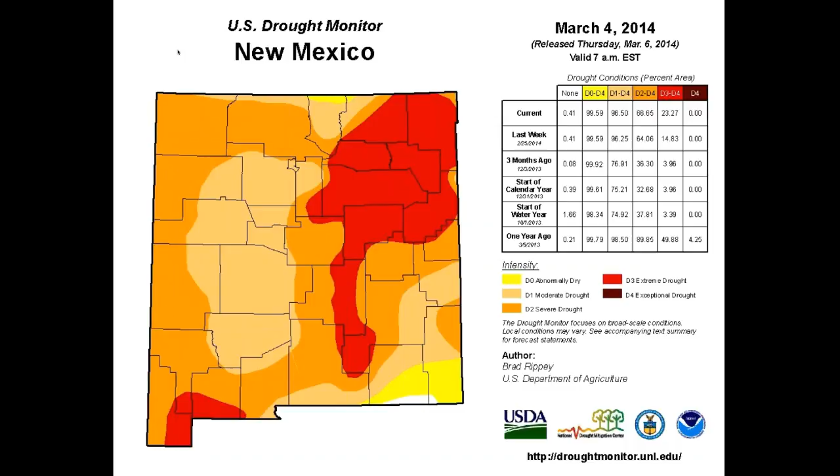Here is the recent U.S. Drought Monitor map showing the West is in a continued long-term drought. Even with the recent water that you've been getting in California, in the long term, things are looking pretty dry. And we're basically living in an age of uncertainty. With all the information and technology that we have, we still don't know what's going to happen with our weather.

With this drought and also with long-term climate change, the experts say we know that we're going to get warmer, but some places may get drier, some places may get wetter, and basically how can we design resilient systems for whatever our uncertain future brings us, right?

And also there's a growing trend in Western countries where people want to know where their food comes from. They want to have increased health while decreasing the miles that their food travels to get to their table. And even wanting to produce more of their own food, right? So many people in the West are actually seeing producing their own food is increasing their quality of life.

So how can we merge our desire to produce our own food while mitigating the effects of our uncertain weather patterns to provide resiliency and abundance for our families and our communities? In this presentation, I want to offer 5 key strategies to do that.

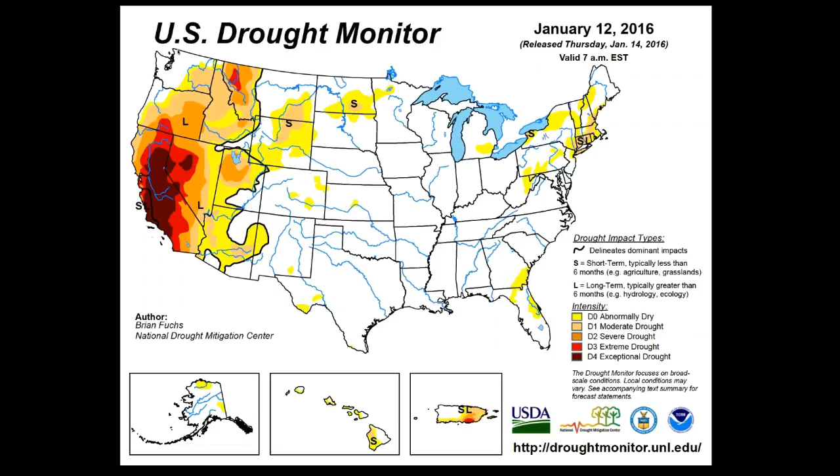So again, we've been in this drought system, and I wanted to bring up the point about drought versus desertification. Drought we have, at a community level, very little control over, but we do have control over desertification at the larger scale, depending on our land use patterns and the engineering and design patterns of our communities, right? So from overgrazing to designing hard structures to drain all of our water away, there's a difference between drought and desertification, and we have some control over desertification.

In the arid Southwest, in the New Mexico region, I'm based in Santa Fe, New Mexico, and in recent years, 2013 and 2014 were our two driest years on record, and we had several wildfires. These wildfires tend to seal the soil and not allow water recharge in the soil, which increases the water runoff. Oops, I got the slides going here. It increases the water runoff, quickly taking the topsoil away and reducing the amount of water infiltration in our soils.

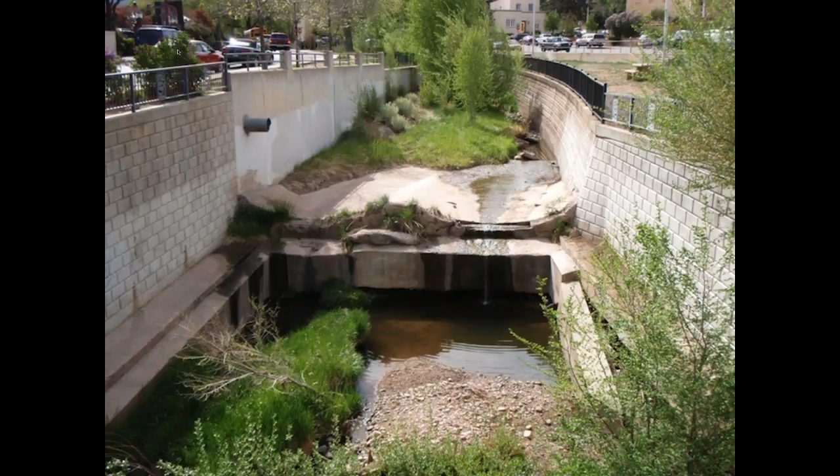This is our mighty Santa Fe River. You can see that it's quite engineered and quite hard. There's much hard structures around it where it can't really infiltrate very well. And again, we can't control droughts on a community level, but we don't need to increase desertification by draining our arid landscapes of the stormwater. This approach to civil engineering and management of stormwater and development and infrastructure projects basically drains our sponge in the soil.

So what is dehydration infrastructure? Basically, it's increased non-porous areas, roads, and houses, deforestation of the mountains, selective overgrazing, stormwater diversion, which of course leads to increased runoff, lower aquifers, loss of rivers, increased work, and less food.

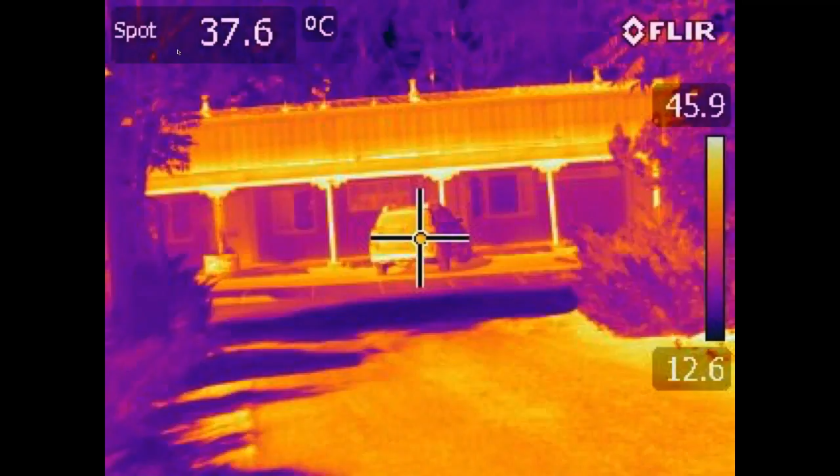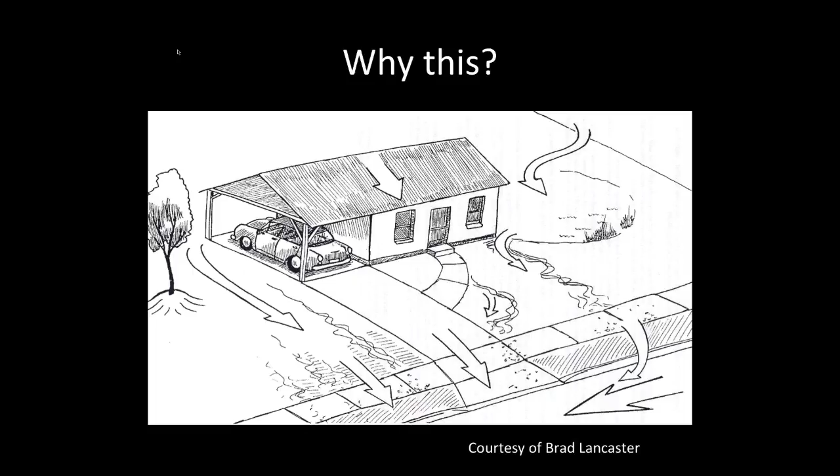So this is typically how we design most of our residential lots, right? We basically designed this dehydration infrastructure into most developments, draining all of the water off onto the street, picking up oil as it goes, rushing quickly to the river. And so why would we design this? Why wouldn't we want to actually keep the water where the plants are and design a more abundant system?

So again, how do we want to design scarcity or design abundance, right? And I wanted to just come with some positive reinforcement today that we can design our way to abundance, right? And these five strategies that I'm bringing today can help us do that.

So again, on the left, this is a path to scarcity. We drain all the water onto the streets. Then we import chlorinated water in our drip systems and barely keep our plants alive. Where we could just keep all of our rainwater on site, infiltrating into areas that are beneficial to the plants, and greatly reduce our need for irrigation and have a more abundant system around our house.

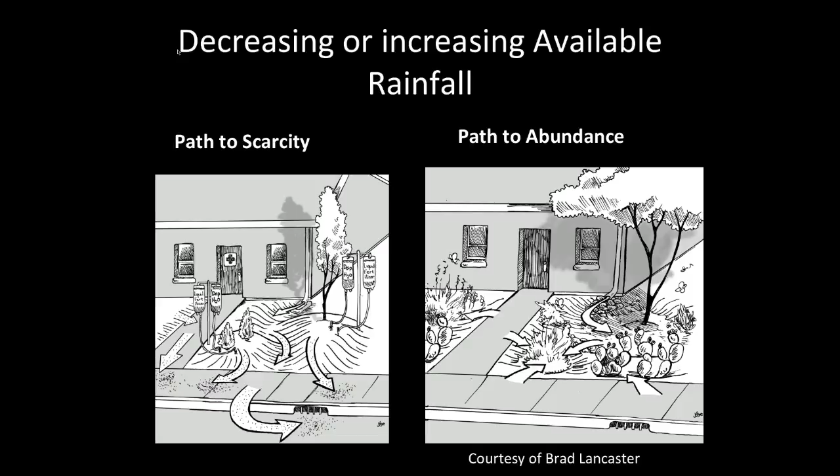So here's some basic water harvesting principles. They're basic common sense. Obviously observing where your possibilities are, what your options are, starting at the top, working your way down. Like so many things in life, starting small and simple. And again, this is our key strategy here, is to slow, spread, and infiltrate the flow of water, right?

And as dry as we've been, and you think it's never going to rain, you always want to plan for the overflow route and manage your overflow as a resource. Because we don't know what the future holds, we're going to possibly have more quick and strong storms. We need to make sure that we're not flooding any areas that we don't want water in, right?

So again, maximize living and organic ground covers, keeping the ground covered so that the roots of the plants can help the water really absorb into the soil better. Again, thinking about how the different parts of your system can work together. We call it stacking functions in permaculture. And then, like everything in life, reassessing your system or accepting feedback, seeing what works and doesn't work, and then adjusting your system to be more optimal from that feedback.

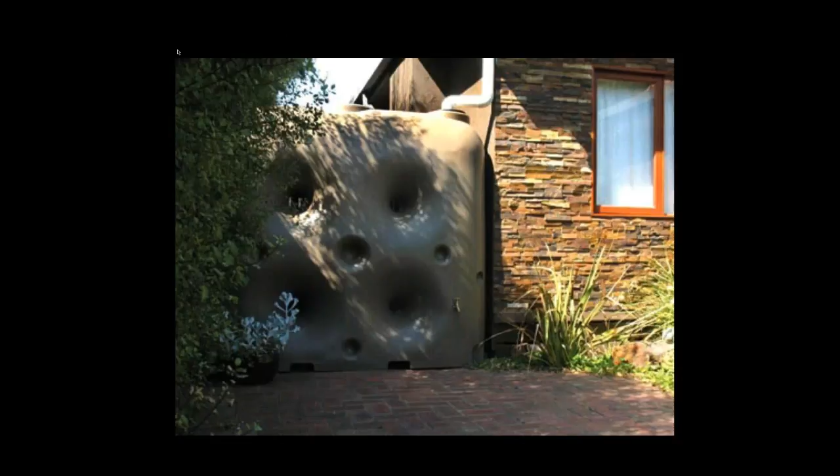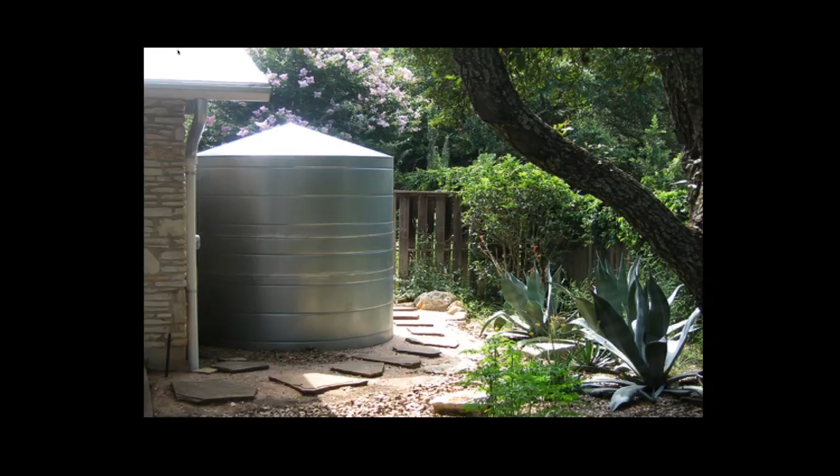So here's just different examples of tanks in an urban setting. They can be beautiful, or they can work into the landscape or the aesthetic of a house. That was a poly tank. This is a galvanized tank. Again, I grew up in Portland, Oregon, and it's known for being wet and lush. And now I live in Santa Fe, that has about half the annual rainfall of Portland.

But if we can use some of these strategies, if I can infiltrate 3,000 square feet of rainwater from impermeable surfaces around my home into 3,000 square feet of productive growing space, I'm basically providing this growing space in Santa Fe with the same quantity of water that's in the equally sized area in Portland, right? So by designing these different systems and having them work together, I can really manipulate the landscape to be more abundant and provide more food.

So in Santa Fe, an average size house of 2,000 square feet sheds over 19,000 gallons of water on average. That's enough water to keep 8 semi-dwarf fruit trees supplied with irrigation water. So even in arid areas, the water can really add up. A lot of times people come to me and say, well, there's not much water, because we only get 12 inches or 14 inches of water. But actually, even that amount can really add up to thousands and thousands of gallons.

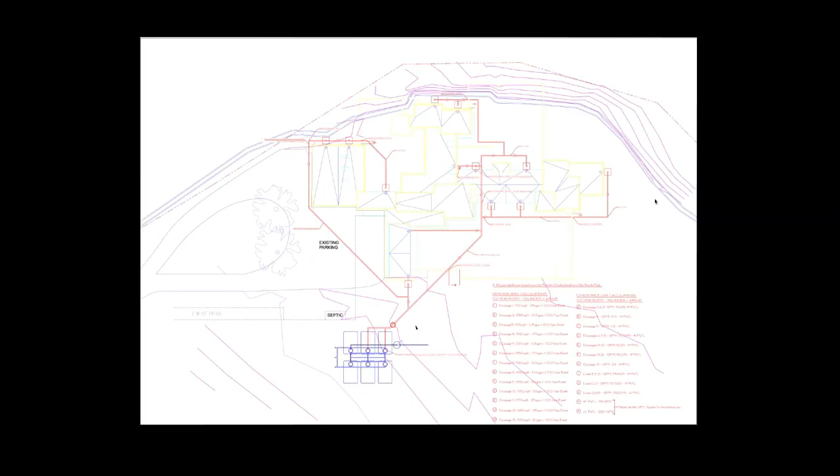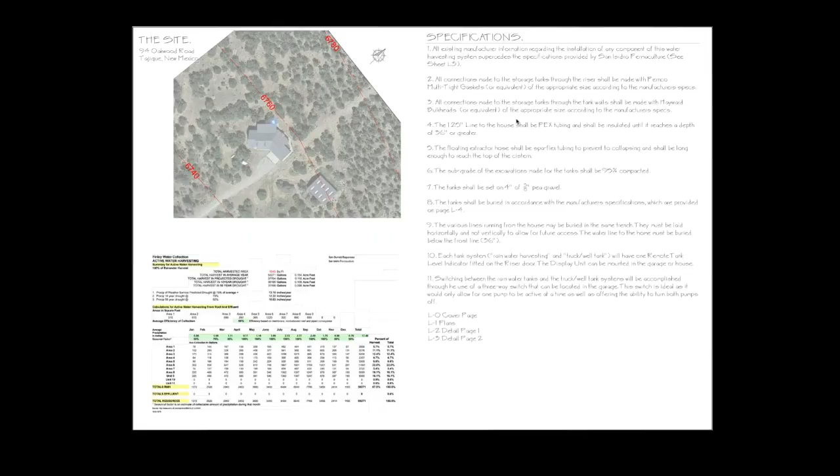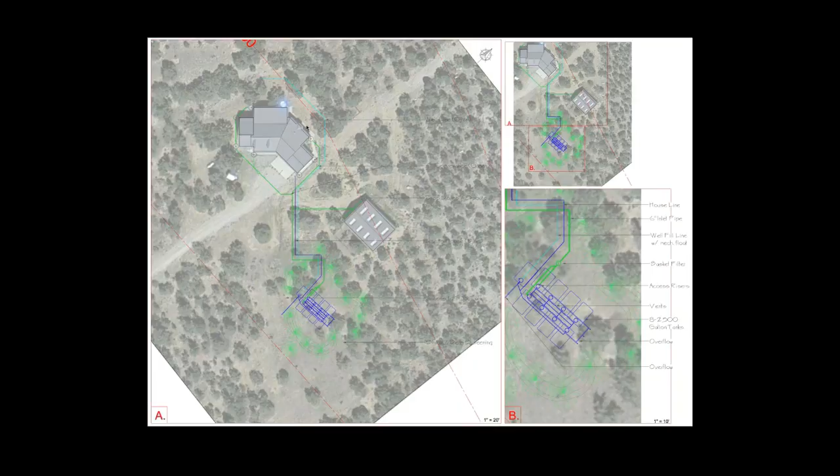This is a design for a 20,000 gallon system. That last system was solely for irrigation water, but this system is for both potable and irrigation. This client's well went dry. This lot is east of Albuquerque, New Mexico. You don't have to read all of this; it's giving you an idea of figuring out the tank size, how many gallons per month and per year. This shows the conveyance lines and where the system is laid out. In this system, we're linking 2,500 gallon tanks together to act as one tank, because that's often less expensive than one large tank.

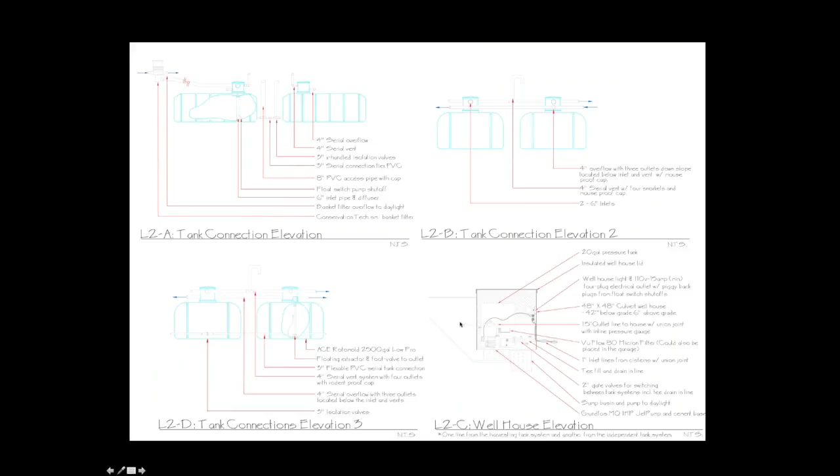Sometimes these systems aren't economical, depending on what your water source currently is. But in other situations, this is either the only way to have potable water besides trucking water in, or it supplies extra security. If you had a slow well, this would be an excellent backup system. Potable systems are all licensed by the state, and the water is brought back into the house and run through a filtration system and an ultraviolet sterilization system.

So here's an example of a more urban setting design, where we have small water catchment tanks next to the pergola, and some of the water is infiltrated passively into the landscape. This is an edible landscape permaculture design here in Santa Fe, New Mexico. With permaculture, we really stress relationships. It's not just the water harvesting, it's not just the plants, but how all of these systems can work together to maximize abundance. And here's our greywater system coming out. These are our greywater infiltrators, so reusing that water as well.

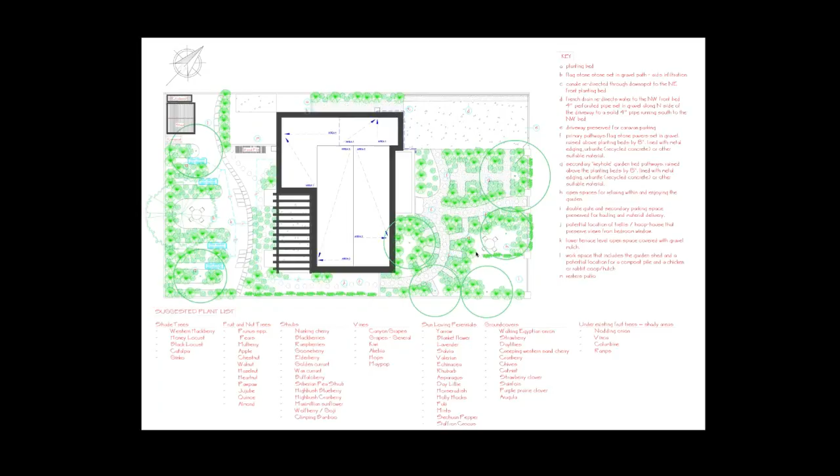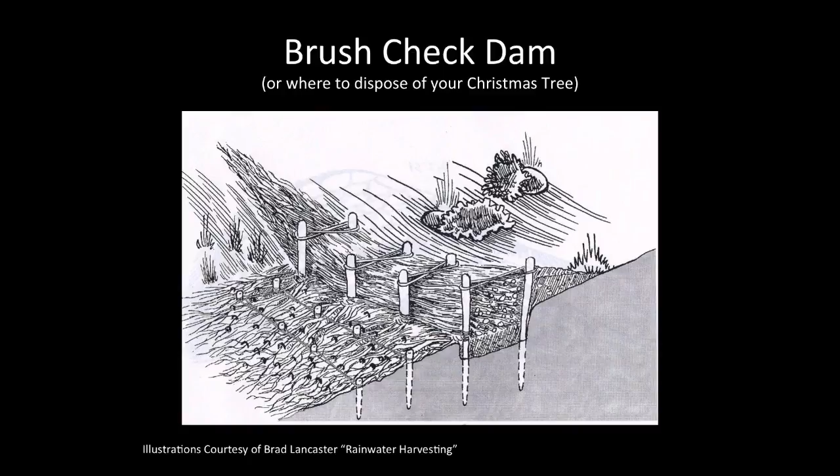After these are in for a season, they'll silt up a little bit behind, providing a nice sponge, and then we'll go ahead and plant attracting plants and native food production plants, native plums, native currants, and plants that can provide habitat for wildlife.

So another technique of passive systems is actually catching water from either downspouts or what we call canales, which are like scuppers, and then you can catch them into these catch boxes. Usually this box will have a pond liner that comes up to more of an edger or something like this, so all the water falling in this circle with the gravel would actually be dropping into this catch box and then draining to some kind of permeable area. So whether it's pumice or gravel or some area to infiltrate this into the ground, so that the neighboring plants can take advantage of that water.

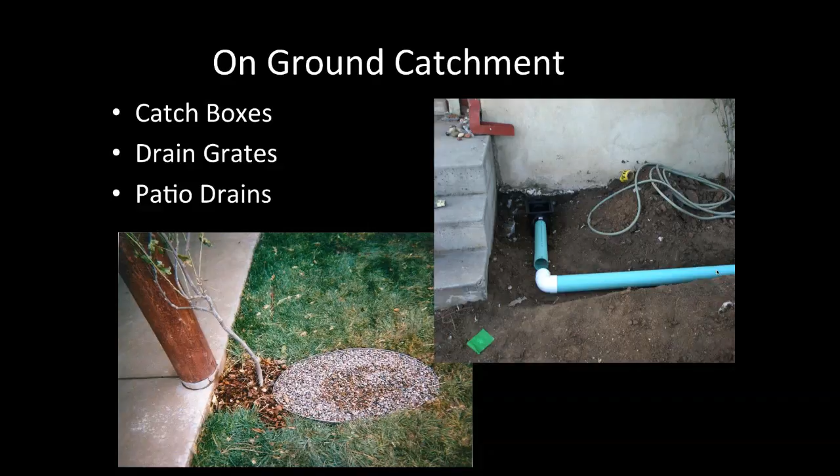So here's an example of, to the left, a water catchment area, like a catch box, and then it's actually draining out. So this part of the pipe would be solid, and then this part here with the pumice, or this is actually scoria, would be perforated pipe so that the water can drain into the soil and provide extra irrigation water and keep that water in the soil instead of running off to the streets.

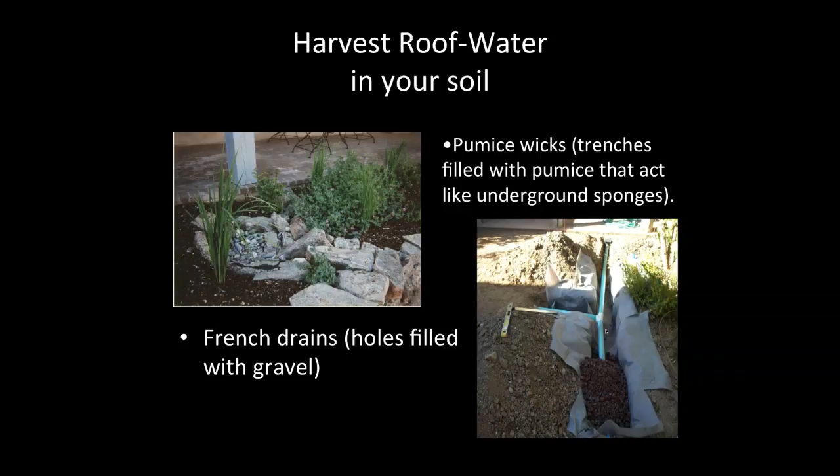So many people have probably heard of swales, and this is another technique of water harvesting, basically berms and ditches on contour. So if you were looking at a topographical map, you would put the swales along the lines of the topographical map, so that these berms would be level to themselves on contour. And so we also do this passive grading, basically, providing for rain gardens or moving the water where the plants are.

So here's an example of kind of a before and after with swales. This is working in Africa. So again, this can be a great tool in our toolkit to really keep the water where we want it and soak it into the ground.

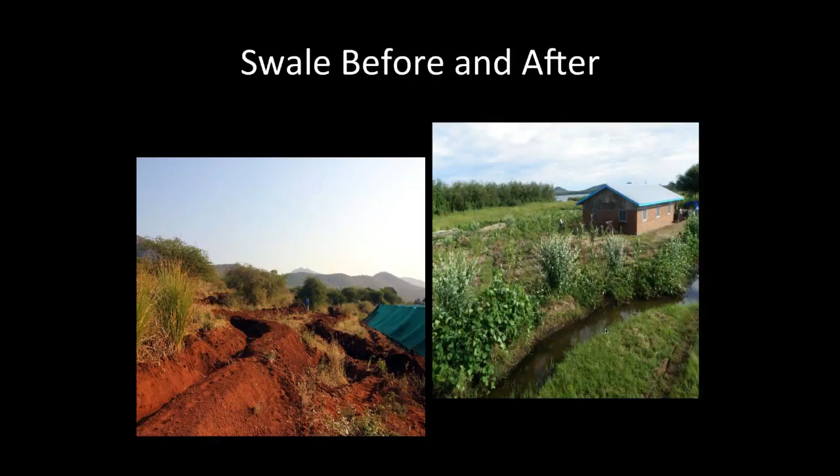This is in Santa Fe, New Mexico, or outside Santa Fe, where this is a project where the people already had some orchards and vineyards, and basically the neighbors were draining all of their water onto their land, and so they were actually on average getting about 8 million gallons per year from the neighboring property, and it was collecting at the low point of their property and rushing quickly to the river. And so with this project, our focus was to slow that water down and spread it across their landscape to support more of their vegetation and reduce the use of their well.

So these are actually swale berms that were put into the landscape through the different plants. This is a rock-lined spillway, so we always, again, want to plan for a beneficial use for our overflows, and so we want to have these overflows protected with the rocks so that it doesn't erode the berm. And then we also, of course, want to plant any disturbed soil with native grasses or wildflowers or some kind of a perennial ground cover to actually hold all of this in place and reduce erosion.

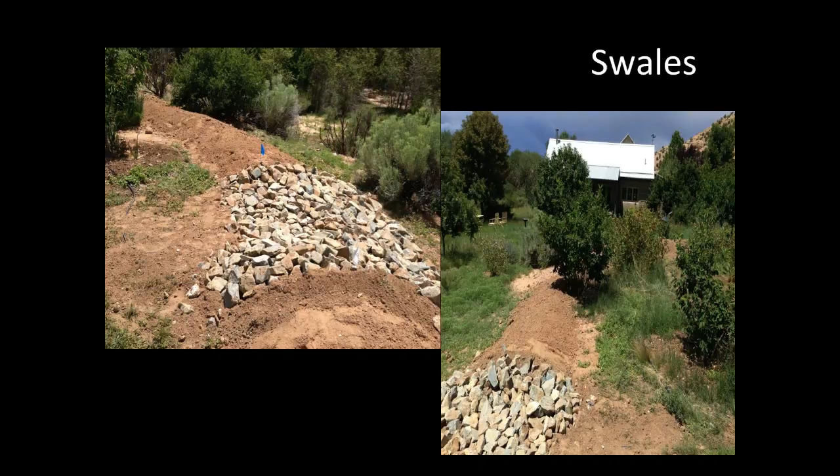Here's another example of berms put into an orchard on the left-hand side with a spillway, and then the berms to the right are around a small vineyard, and this is actually after they're already planted out or seeded with native grasses and wildflowers. And so the mulch on here is like a native hay mulch that we use with our seeding. So you can see that this catchment area in here really holds the water as it comes through and soaks it into the soil and really supports the growth of the vineyard.

Here's another project where we did those swales and passive grading to harvest water. And so you can see a job after a few years, how well the plants are doing. So there's some hackberries in here, some mulberries, some three-leaf sumac, some Nanking cherries, some choke cherries. You can kind of see how these systems evolve over time.

Basically, you're setting up the landscape to be successful by itself, or more or less by itself. Catching the stormwater, infiltrating it, having productive plants in the system, and just basically designing a perennial food forest system.

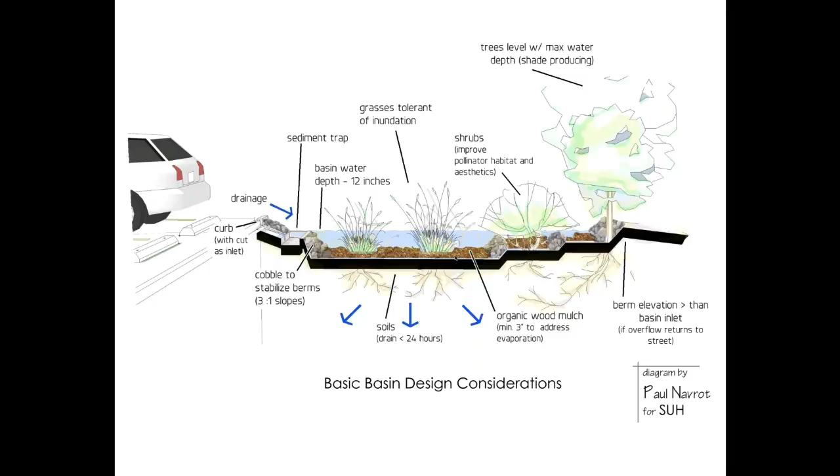So these bioretention basins, they're usually shallow mulched basins that collect runoff from impervious surfaces, and they're planted with appropriate vegetation to live off passive irrigation. So it's not just simple landscaping, but with careful planning, bioretention basins can address watershed concerns associated with urban growth.

And a lot of the issues, like in Portland where I grew up, it used to be where, when there was a large rain, the sewage system would get overloaded and basically dump raw sewage into the Willamette River. And so these systems can really help mitigate that stormwater, move it into the landscape, soak it in

Sorry about that. Let me just put. Are you still there, Jeremiah? Does anyone have any questions? Yeah, sorry about that. I thought I had phone on mute, but I'm in my office, so it should go to voicemail.

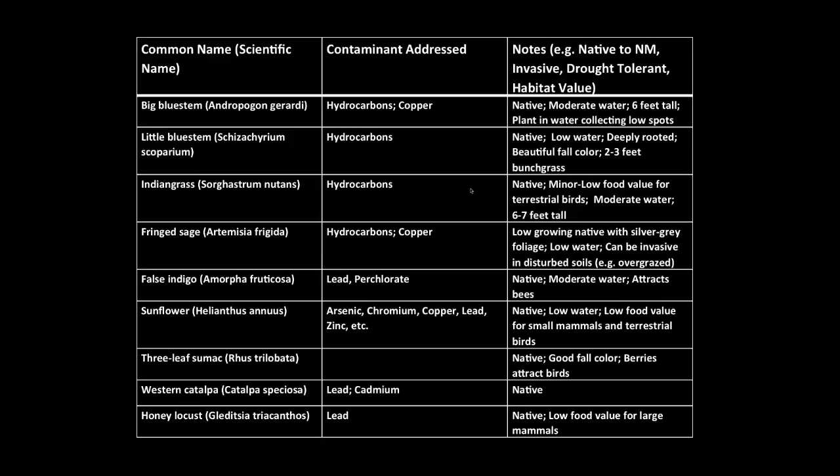And then the third strategy of creating an abundant landscape is really working on your soils. So thinking about how can we increase the water harvesting capacity of our soils, right? So that's through increased organic matter in the soil. So there's lots of different methods for increasing the water capacity of our soils. We can do it by diversifying our soil biology, by applying mulches to the surface of the soil, and also increasing the organic matter of the soil.

So obviously that's by building up the organic matter, diversifying the soil with maybe mycorrhizal inoculant. Basically all the organisms, their main activity in the soil is to grow and reproduce, right? So if we can support the symbiotic processes of those organisms to give and take nutrients back and forth to each other, increasing that soil ecosystem, then we'll have a more resilient system.

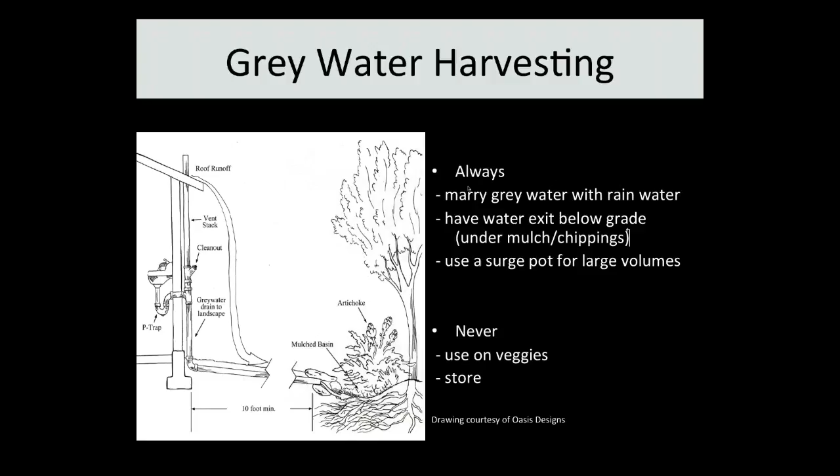So here's some different really simple branch drain gravity systems. So this is one of our jobs where we're planting fruit and nut trees, and then basically using the basins that the trees were planted in as our surge basins. So as the gray water comes out, it gets split to the different pipes and the different areas into these drainage basins that have holes in them that infiltrate into the soil next to the trees.

And then these buckets would be covered by a stone or a piece of concrete or something where you could access and look at them, do an inspection later on. So here's some other, that's more of a branch drain system. This is courtesy of Brad Lancaster. This is an idea of basically the laundry to landscape.

So taking your laundry machine, you can either have it just go out and split like that last picture, where it just splits from 100% to 50% to 25% to 12.5%, or you can actually have each pipe going to different areas like this is showing. So if you had to use bleach to sterilize something, you could move the pipe to the sewer, or you can move the drain pipe to different areas of the garden.

And then there's other valves like 3-way valves and 4-way valves where you can have an actuator switch. You could actually have a valve under the floor and not have to touch or move the pipe, and have a switch on the wall where you can just pick where the water will go. And so this is an example of what we call laundry to landscape, which is taking the gray water out to these mulched basins.

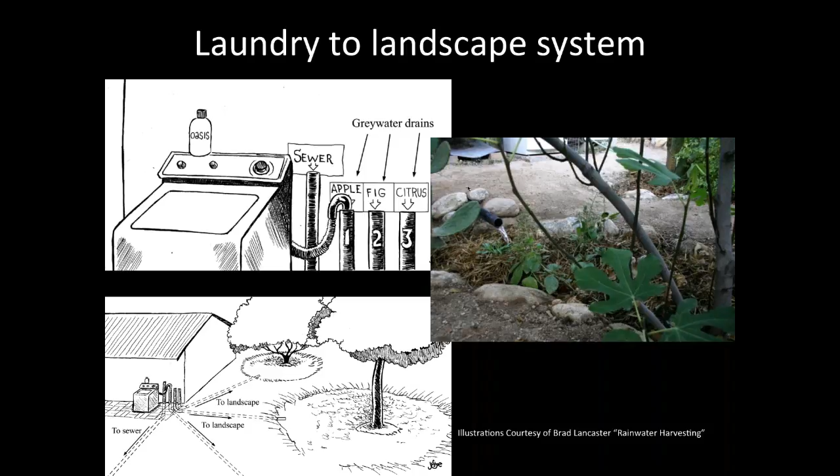So this comes back to another point with gray water: you don't want to store gray water. You want to just use it as you produce it. This gray water will become black water and get smelly within 24 or 48 hours because of the different nutrients and bacteria in it. So just get that water out to the landscape as you produce it, and you won't have any problems.

In my house, I actually reuse all of the water out of the house. So I actually reuse my black water and gray water. I had one little point too about gray water. According to the U.S. EPA, the average American family of 4 uses about 280 gallons of water per day for indoor use. Of that water, about 204 gallons is gray water, the rest being black water for toilets or kitchen sink. So a family of 4 on average is producing about 200 gallons a day.